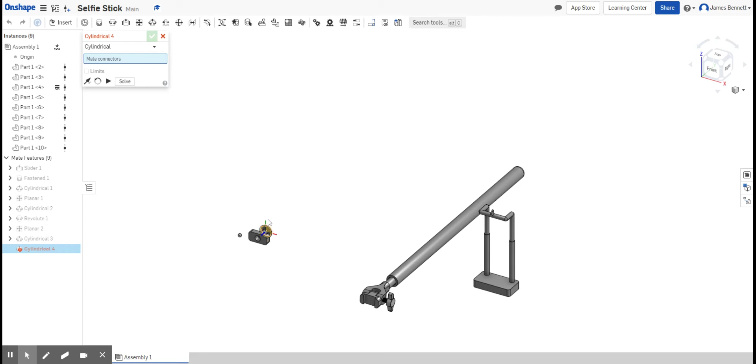Now you can see the pin is inserted, but it's not inserted all the way. If we want to insert something all the way, what we're going to need to do is actually get this face and this face to connect. So I'm going to use a planar constraint, use the constraint to grab the face, and we're going to revolve around and grab the other face. Now the pin has been fully inserted. We're going to go ahead and close that out.

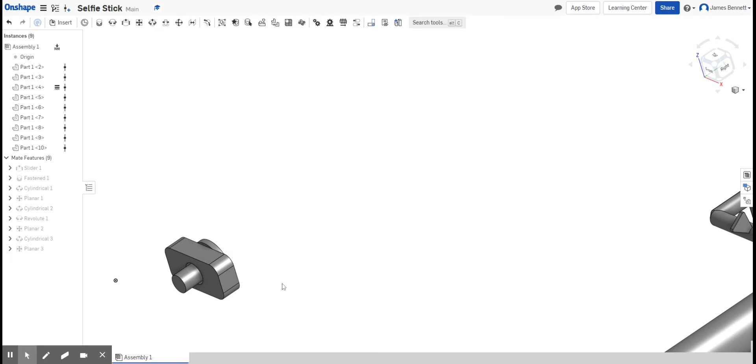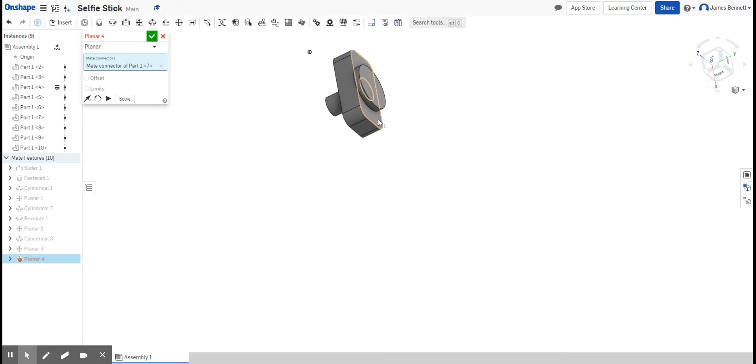Now that's not the last time we're going to use the planar constraint here. What we want to be able to do next is take this piece and connect it here. This little pin should be facing out. So I'm going to grab the planar constraint again. I'm going to zoom in and we're going to attach it to this face. So we'll zoom back out. We want to zoom in on this part and pivot around, and we'll attach here. Now hit the check. Our pin will follow it.

And then when we come around, we'll see that these have come together. The difference being, notice that it's kind of offset. That's not what we want. We want these to be flush with each other. Well, I'm going to come around to the other side, zoom in again, and I want to grab that planar constraint. Well, it's already selected for us. I'm going to select a face, and then check. And we notice that it pops out. I'm going to close this.

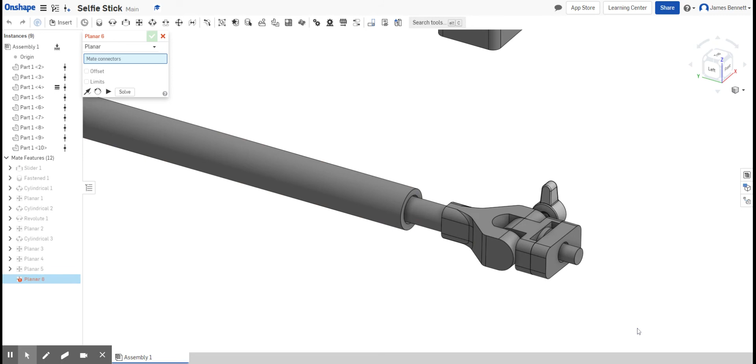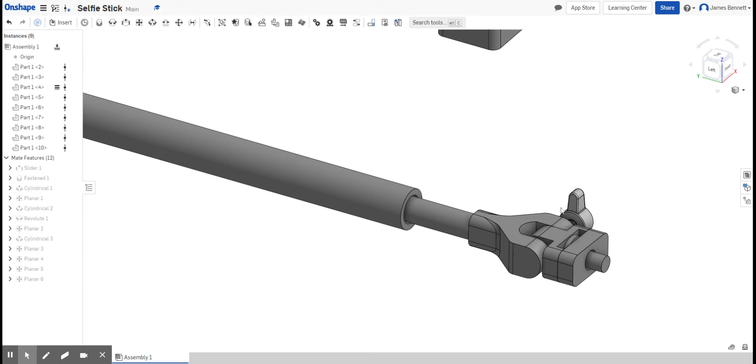We're going to check our constraints by kind of trying to move things around. I see this still moves up and down, though for the most part it's in about the correct position. I'm going to grab the planar constraint again. I want this face to be flush with this face. So when I click it again and check, notice it pops out once again. Now I'm going to check my degrees of freedom and try to move this around. It looks like this time it's attached correctly.

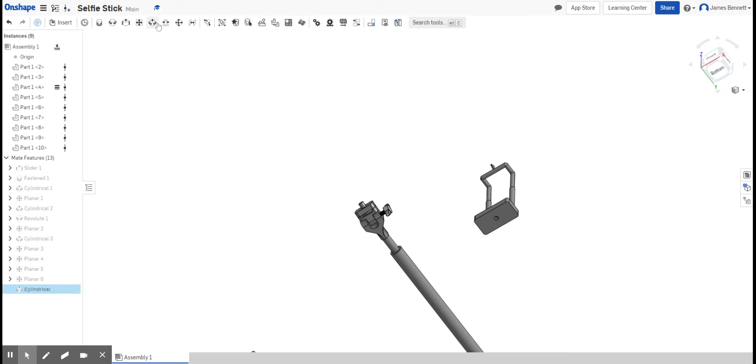By using the planar constraint, I'm making it possible to take two faces and connect them together or make them flush depending on how I apply it. I'm going to go back to my isometric view. The last thing that I need to do is attach this pin to the base of this phone holder. So I'm going to grab a cylindrical constraint. We are still dealing with the cylinder. I'm going to click on the tip here and then come in here and click on this circle. And now I'll click the check.

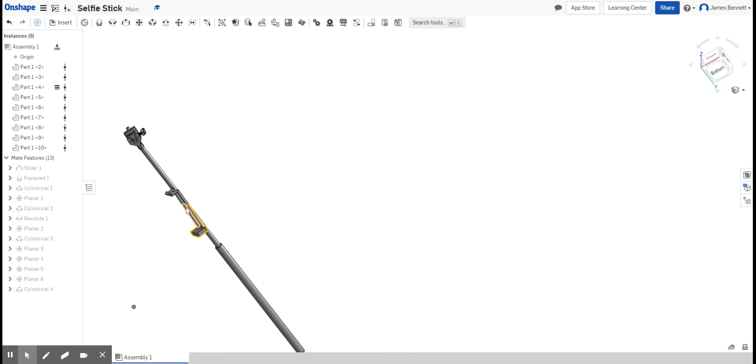Now remember that was an attached constraint. We were using a cylindrical constraint there. Now when I try to move this away, notice it does act a little bit oddly. So there's still something I need to do. What I need to add is I need to make sure that all these stay together. So not only am I going to use that cylindrical constraint, I'm going to use another one to make sure everything stays appropriately attached. I want to use my planar constraint and press on this side.

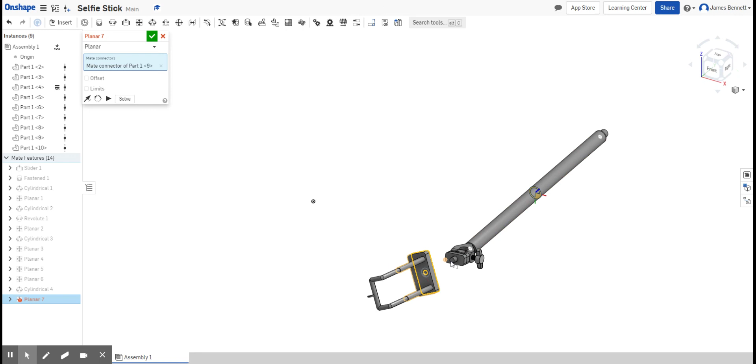And I'm going to come back around and click this surface. So it's going to be attaching to the surface here. So not only is the pin inserted to make sure it's centered on the right location, but it's also attached face to face. So if I pull out to an isometric view, I shouldn't see that bizarre behavior any longer. Now everything is attached just the way I want it.

This is my first assembly. We've managed to put together several parts using different constraints. The order of these constraints is important, and making sure we attach things in the correct order will allow us to get the proper motion for every object.